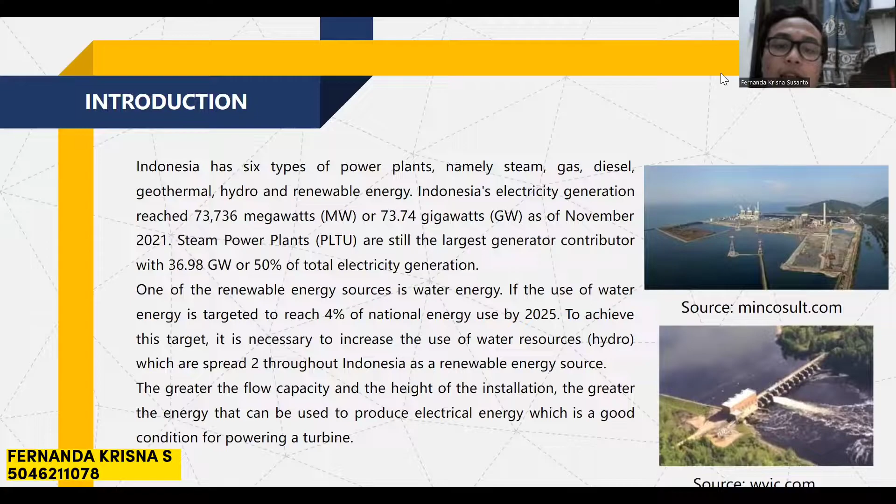If the use of water energy is targeted to reach 4% of national energy use by 2025, to achieve this target, it is necessary to increase the use of water resources or hydro, which are spread throughout Indonesia as a renewable energy source. The condition of water that can be used as a power source is having a certain flow capacity and installation height. The greater the flow capacity and the height of the installation, the greater the energy that can be used to produce electrical energy, which is a good condition for powering a turbine.

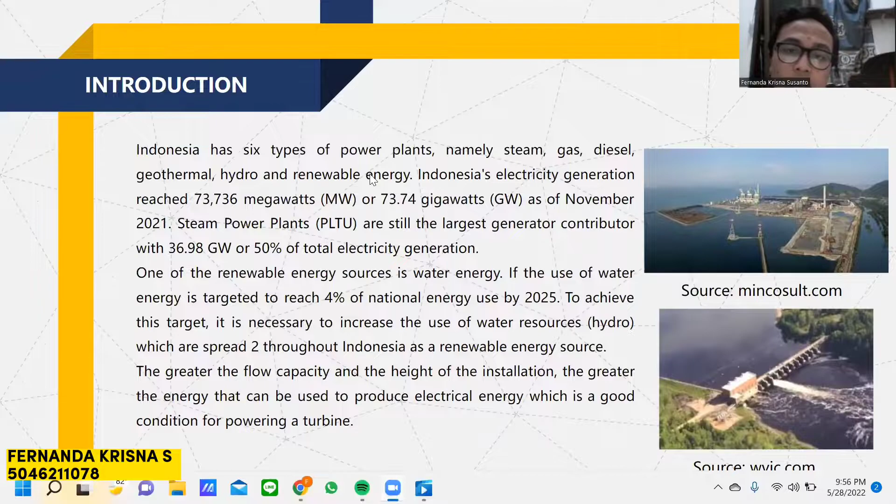According to Bhatia in 2014, a turbine is a device that converts mechanical energy stored in a fluid into rotational mechanical energy. There are several types of turbines, including steam turbines, gas turbines, water turbines, and wind turbines or windmills. The turbine converts the kinetic energy of the liquid into mechanical energy through the principle of impulse and reaction or a mixture of both.

In the turbine, there is a turbine generator. It is a device that uses steam, hot gas, water flow, or wind to cause a rotating motion that activates electromagnetic force and produces electricity.

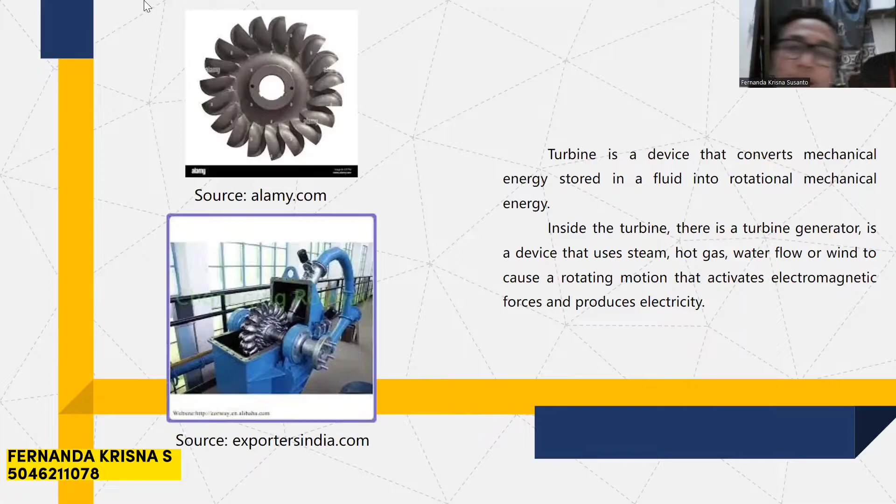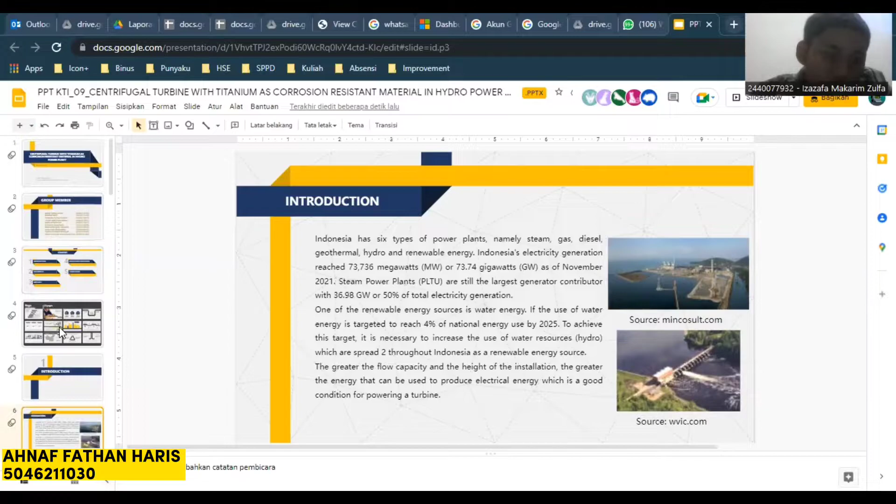My NRP is 5046211030. Generators generally use some types of material, for example metal. In general, metal is used to build many types of turbine. Turbine generators usually use iron and/or aluminum, because that material is strong and solid, but sometimes metal, or just iron and aluminum, cannot be the solution for the best material.

Because of that, we made this paper to give our solution and tell you our solution for the best material for turbines.

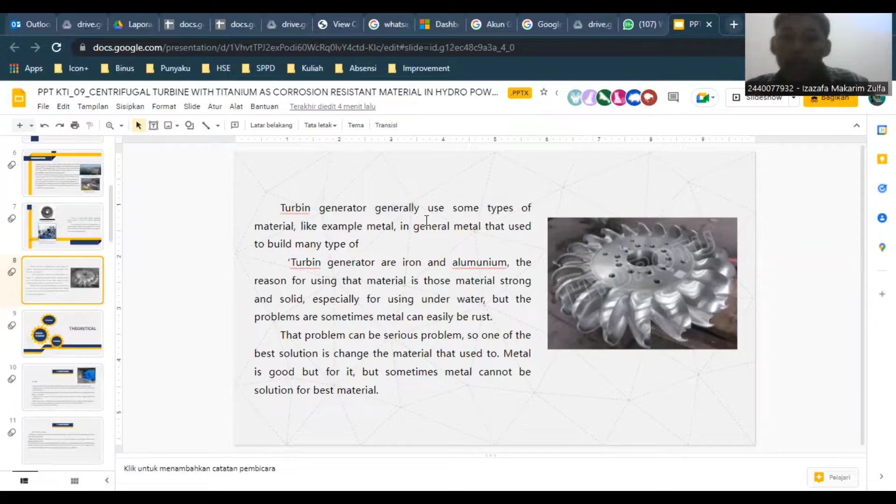And now is the theoretical part. The first one is water turbine, the second is corrosion, and the third or last is titanium. The first one is water turbine. A turbine is one of the various devices that convert the energy of a fluid flow into mechanical energy. By aligning the current so that a tangential force or torque is applied to the rotor blades, the rotor rotates and work is drawn.

Turbines are also divided by operating principle and can be impulse turbines, driven by a high-speed jet of water. A water turbine is a rotary machine that converts kinetic energy and potential energy of water into mechanical work. Water turbines may be defined as prime movers that transform the kinetic energy of the falling water into mechanical energy of rotation and whose primary function is to drive an electric generator. They are mainly used to produce electricity.

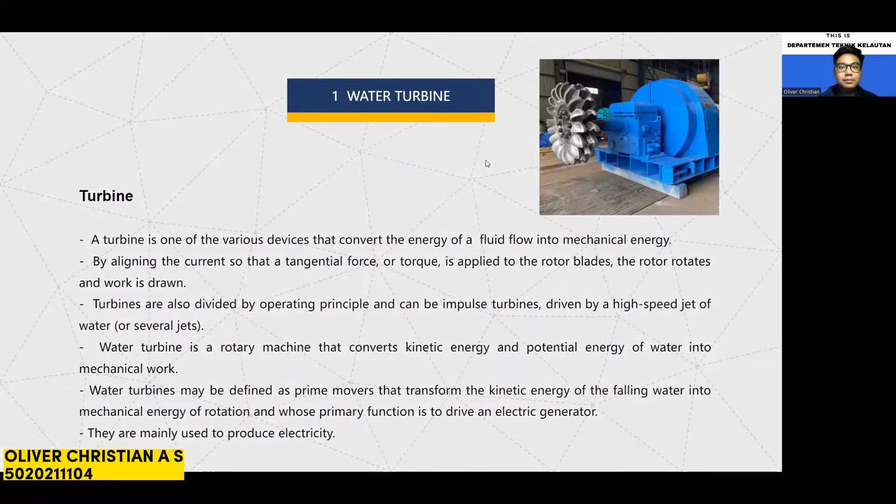And then I will explain about the centrifugal turbine. Centrifugal compressors are used to power gas turbine engines used in jet aircraft, power generation, and other heavy industry applications. Many factors affect the performance of compressors and turbine engines, including blade dynamics, fluid dynamics, and gas physics.

Centrifugal pumps as turbines can be relied on with high efficiency in small-scale generating units. There are many applications of pumps as turbines in the field. Pump application as turbines can be carried out in irrigation canals, dams, water towers of high-rise buildings, utilizing the cooling condensation waterfall.

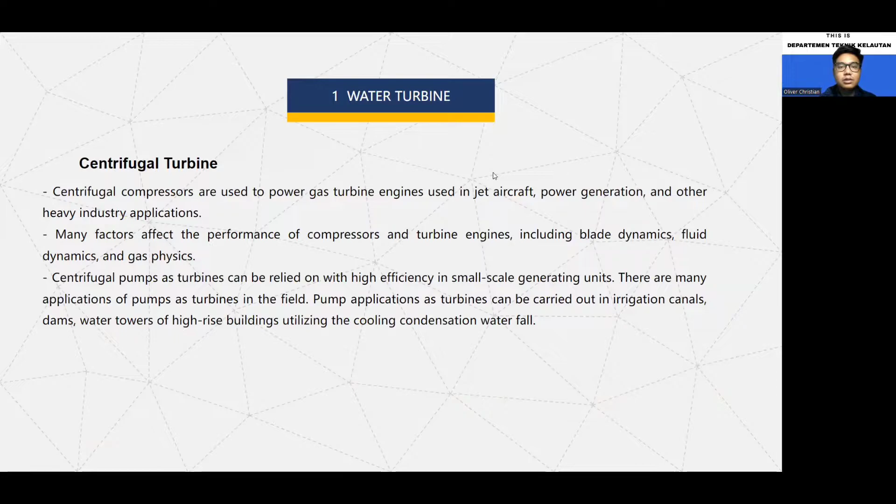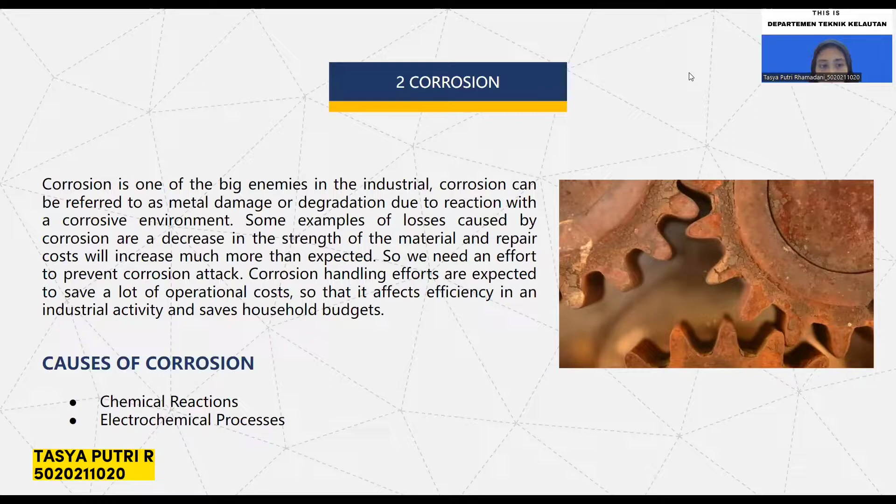Okay, corrosion is one of the big enemies in industry. Corrosion can be referred to as metal damage or degradation due to reaction with a corrosive environment. Some examples of losses caused by corrosion are a decrease in the strength of the material, and repair costs will increase much more than expected. So we need an effort to prevent corrosion attack. Corrosion handling efforts are expected to save a lot of operational costs, so that it affects efficiency in an industrial activity and saves household budgets.

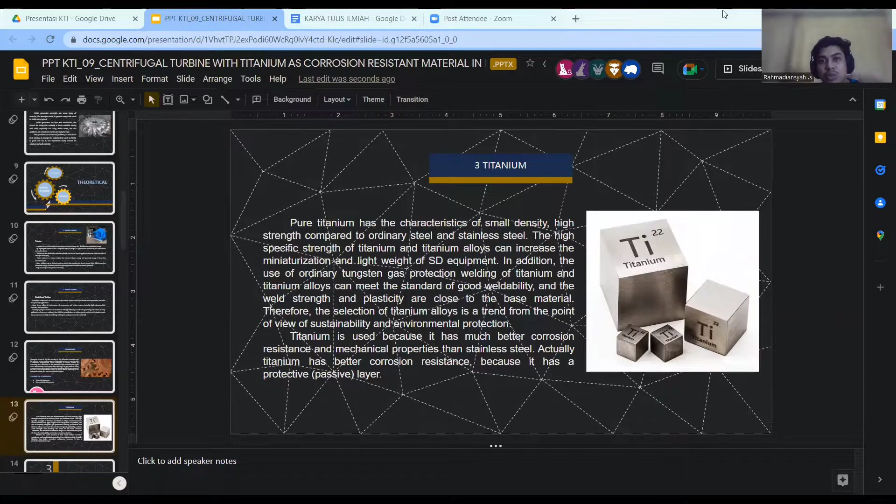Okay, the first one is identification of the problem and research. This stage is arranged based on the material problem in hydroelectric turbines. Therefore, we need an idea to solve this problem. And then we have literature review and data collection.

At this stage, the process of collecting data and studying literature on the types of material used in power plant turbines is carried out. From the data collection, information was obtained about the corrosion of marine materials, the advantages and disadvantages of materials commonly used for power generation, material characteristics, and turbine type efficiency from scientific journals.

After that, we do data analysis. The data that has been obtained and has passed the literature review process is then processed to obtain and determine the effectiveness of the material used. And then we have development and discussion.

The results of the data processing from the ideas obtained result in output in the form of efficiency, environmental, and economic reviews, presented in the form of figures and tables to strengthen understanding. And the last is conclusion. This stage is the last step to obtain conclusions based on the results of the analysis obtained. And the next explanation will be given by my friends.

Hello everyone, my name is I Gede Adhi Paramartha. My NRP is 5046211007. I'm from Group 9, Stones. Today I will present the results and discussion of our scientific paper. The effectiveness aspect of titanium turbine design.

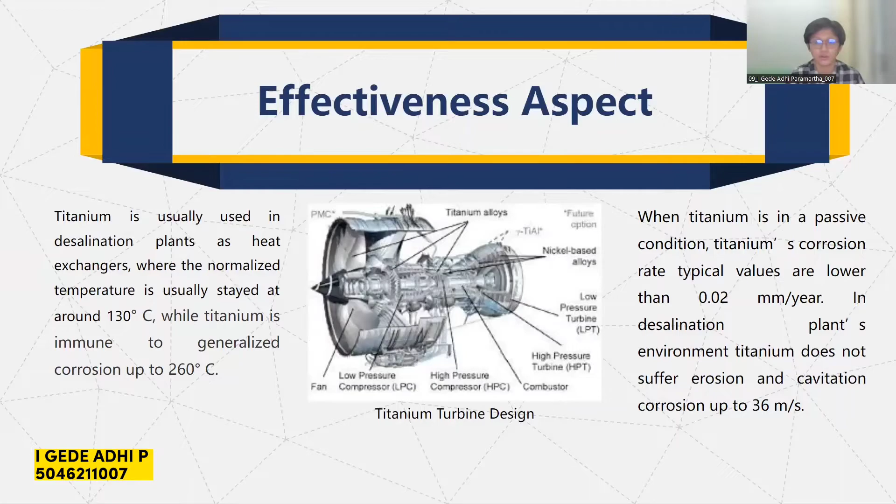Titanium is usually used in desalination plants as heat exchangers, where the normalized temperature usually stays at around 130 degrees Celsius, while titanium is immune to generalized corrosion up to 260 degrees Celsius. When titanium is in a passive condition, titanium's typical corrosion rate is lower than 0.02 millimeter per year. In desalination plant environments, titanium does not suffer erosion and cavitation corrosion up to 36 meters per second.

Okay, so before I continue the presentation, let me introduce myself. My name is Athalla Rafif with last 3 NRP digits 110. So the next one is environmental aspects. The first point we are going to discuss is less negative impact. Since titanium has never been reported to have any negative impact on the environment, this water turbine will likely experience less trouble than a normal turbine. The next one is the hydropower impacts in general.

So in general, hydropower impacts can be categorized into two, namely project impacts on environment and environment impacts on project. So the first one is project impacts on environment. These include changes in land use, changes in microclimate due to inundation, occurrence of downstream community, accidents due to water release, and high rates of erosion and sedimentation.

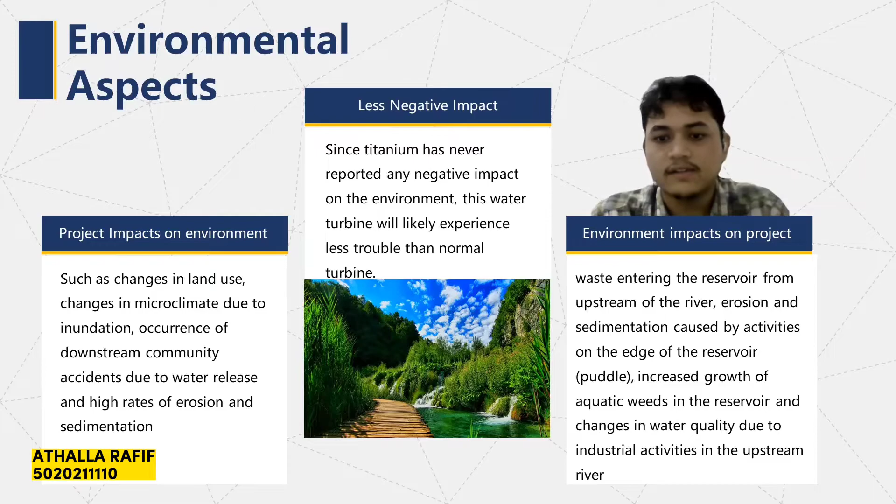The second one is environment impacts on project. Examples of this impact are waste entering the reservoir from upstream of the river, erosion and sedimentation caused by activities on the edge of the reservoir, increased growth of aquatic weeds in the reservoir, and changes in water quality due to industrial activities in the upstream river.

Okay, I'm Thania, and I'll continue about why titanium is better than steel in the economic aspect. So, based on my search, economically, various sources state how high the price of raw titanium is on the market, but it brings many benefits such as lifetime, durability, and better elasticity.

Furthermore, titanium is a material identified with light and strong properties. So even though we spend more money to buy this material, it has good quality and is easy to form. On the other hand, titanium is able to maintain anti-corrosion against destructive solutions such as chlorine and seawater.

And then at Alibaba, the price of raw titanium can reach about $32 per kilogram, and one production of a turbine requires a minimum of 30 kilograms of material, not yet including manufacturer service and other supporting things. However, it emphasizes once again that titanium is the latest solution for an industry that still relies on steel.

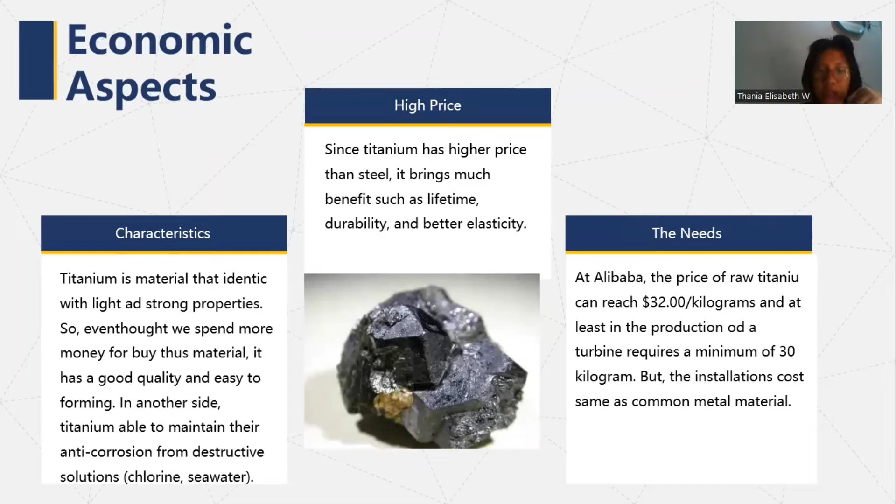Okay, in this section, please let me, Ricardo Sinambela, with student registration number 5020211059, conclude the results we have from this research. It could be stated that using titanium material for water turbines, especially the centrifugal water turbine, can increase performance effectiveness, remain environmentally friendly, and increase efficiency. It is because of these three main points.

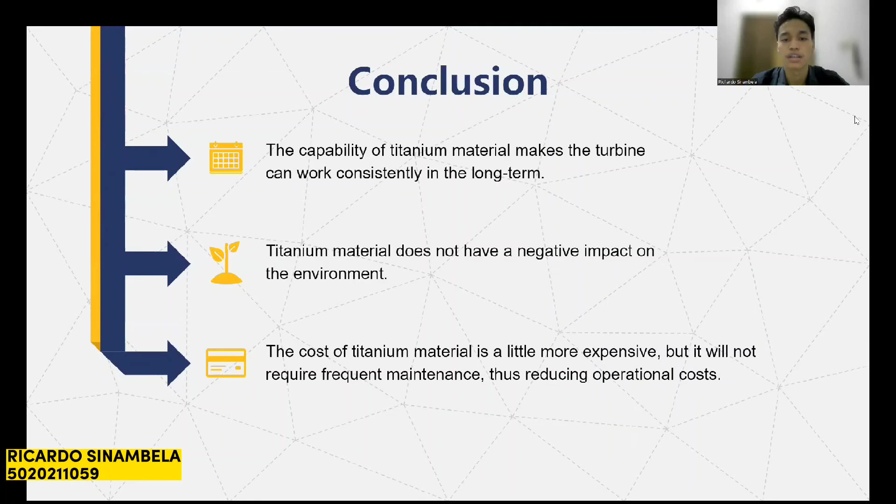First, the capability of titanium material makes the turbine work consistently in the long term. Second, titanium material does not have a negative impact on the environment. And third, titanium material is a little more expensive, but it will not require frequent maintenance, thus reducing operational costs. Finally, with the advantages provided, the use of titanium material could be a good option in the development of water turbine technology as an energy generator in the future.